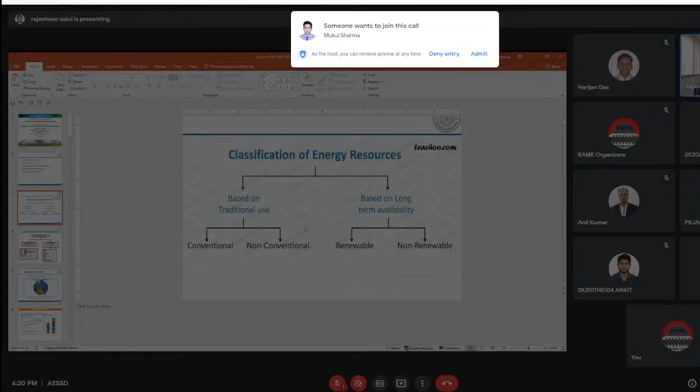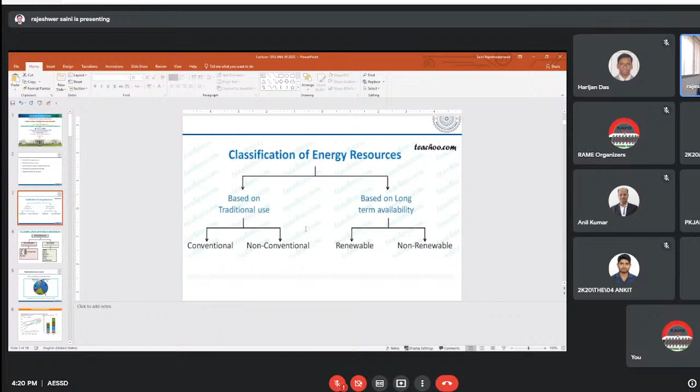I'll start with the basics. We all know energy resources can be classified - sometimes we use terms like conventional and non-conventional, sometimes renewable and non-renewable. Based on traditional use, what is conventionally being used is known as conventional source of energy, and non-conventional is what we've just started using. Based on long-term availability, this is renewable and non-renewable.

So how do we define renewable energy sources? We all know that non-renewable sources are not replenished after use - if you consume that source, it will not come back. But renewable energy sources are naturally replenished after use. That's the advantage and the beauty of this, because we don't have any problem with the quantum. We have substantial use of non-renewable energy, and we have fear that after long use, this will be vanished. But that is not the case with renewable energy.

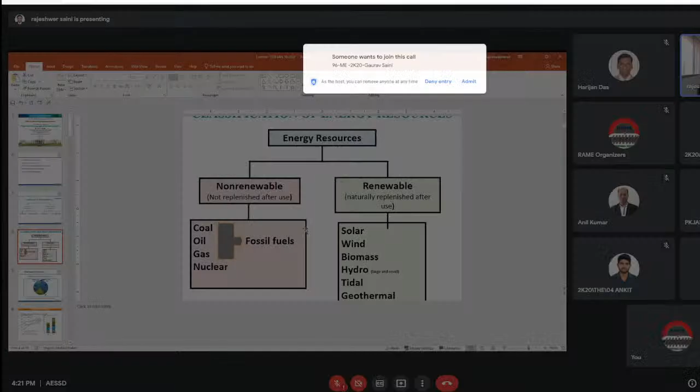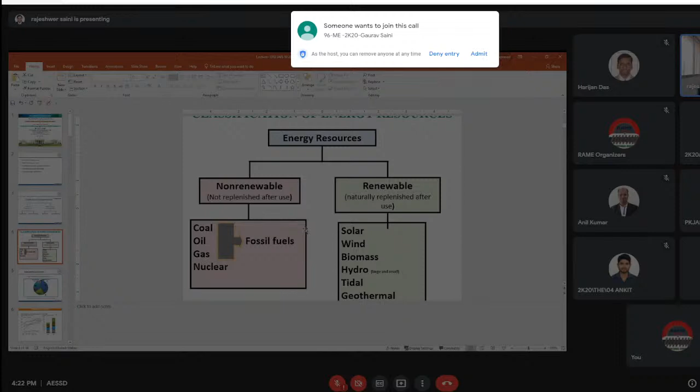In India, we are lucky to have a lot of renewable energy sources, especially solar energy, wind, biomass, and hydro. Among these, solar energy - we fall in a region of the world with maximum intensity of solar radiation intercepted over the Earth's surface. Wind we also have, but it's very site-specific. Biomass, of course, and we have a huge amount of hydro power.

I'll be talking about this because in 1.5 hours I cannot discuss how we estimate these resources and the basics behind the technology, but I'll talk about the potential and related technology. Finally, I'll discuss the integrated renewable energy system - what is the need for it, and how we can start working in this area, because we have a lot of scope there.

Especially I'm talking about the grid-connected system - there we can rely upon a single resource, but in remote areas where the grid is not available, there the role of the integrated renewable system comes in, and then we can achieve sustainable development through this integrated renewable energy system.

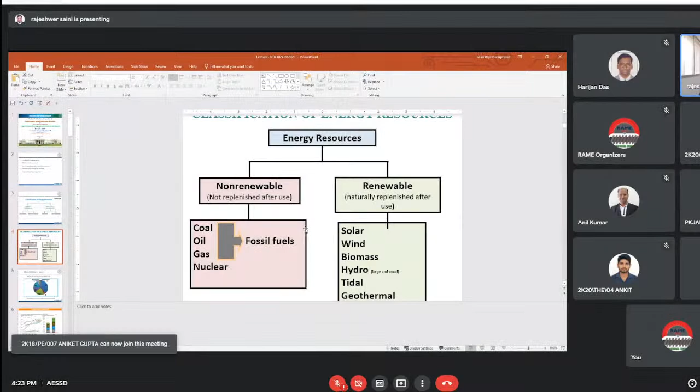This is an overview of the global electrical power scenario. We know that worldwide, about 64% or more than 60%, we still rely upon fossil fuels, and there are a lot of disadvantages. Apart from it being a fixed quantity, there are environmental issues - global warming and CO2 emission problems.

That's why the world has started thinking about renewable energy. In India, we worked in wind energy and hydro exclusively, but after 2010-2012, when the Jawaharlal Nehru mission came into existence, we started working in solar energy, because we have a lot of solar energy potential.

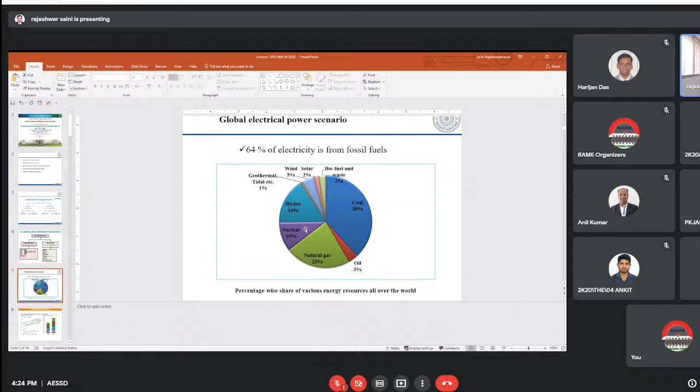I'm talking about a similar situation we have in India also.

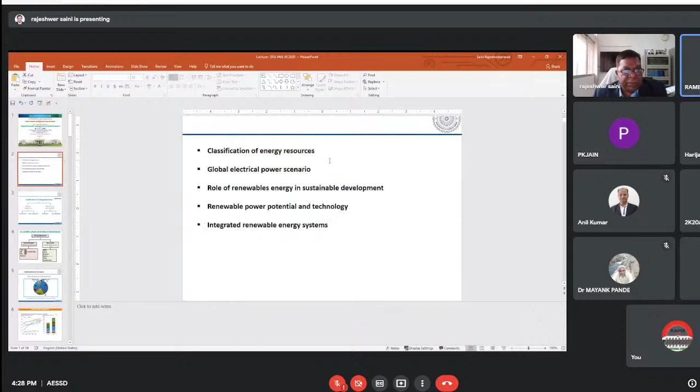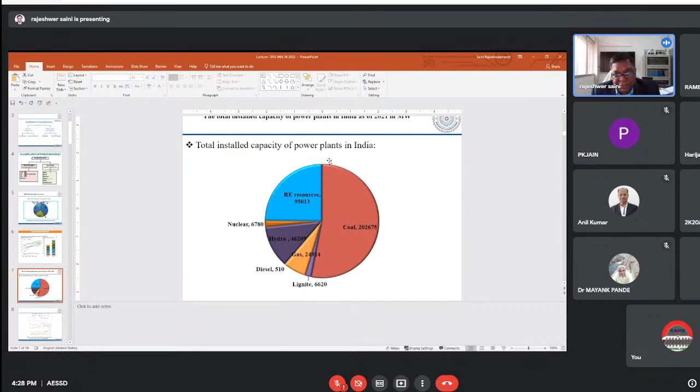I just discussed that still in India, we are relying upon fossil fuels, and about more than 64% we are still generating through fossil fuel. So we have to reduce this share with renewable energy sources.

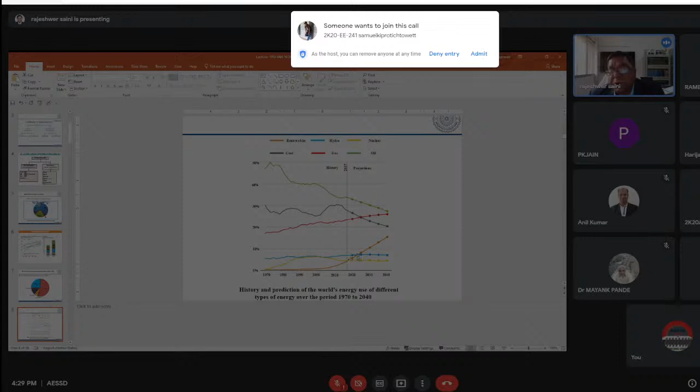Is it visible, I think? Hello, yes sir, okay yes sir. So as I told you, when we started developing the solar PV based plant, the share of renewable energy is going like this trend only. So that means we hope that up to 2040, we will be comfortable, meaning most of the share of renewable energy consumption or energy generation will be through renewable energy sources.

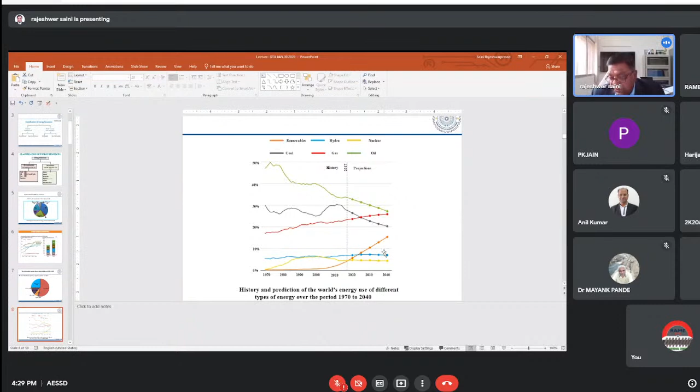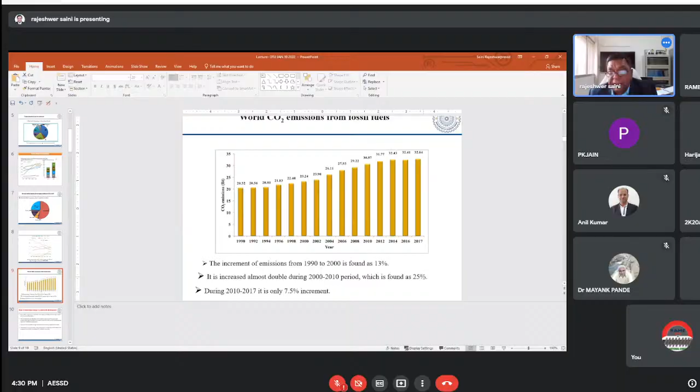The impact I'm giving you is that since 2000, after 2012 and 2014, CO2 emission increment from 1990 to 2000 is around 13%. I think we can see over here. And it was almost double during the 2000-2010 period, which is found as 25%. And now from 2010 to 2017, it is only 7% increment, because we have started developing solar photovoltaic plants. So that is the impact on CO2 emission we can have.

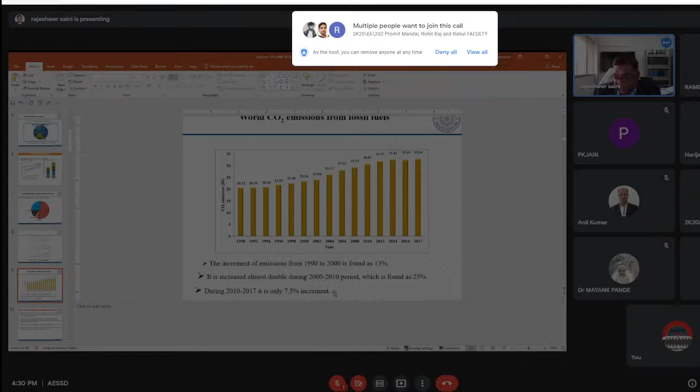So similarly, we have to increase the share of renewable energy sources in order to generate electricity or for energy consumption. So this role of renewable energy in sustainable development, I'll read these few points so we can understand the importance of integrated renewable energy. Renewable energy has an important role to play in meeting future energy needs in both rural and urban areas. When we talk about integrated renewable energy systems, the focus is on rural areas where we don't have the grid, or conventional source-based power generation. So there, integrated renewable energy applies in the rural area. But of course, renewable energy also has a role in urban areas.

The development and utilization of renewable energy should be given high priority, as we all know, especially in light of increased awareness of the adverse environmental impacts of fossil fuels. The need for sustainable energy development is increasing rapidly in this world, as we already discussed. Widespread use of renewable energy is important for achieving sustainability in the energy sector in both developing and developed regions. That means the role of renewable energy is something we have to consider.

In both ways, we have to develop some mechanisms to assess the potential. There's still a lot of work to do. We have some data on how much of particular renewable energy sources we have, but that data is not very reliable. So we have to work so that we can come to know the exact value, or near the right estimations. Why am I talking about this? Because based on the estimations, that will encourage us. If we know the potential estimation correctly, there's a chance we will have optimal design or development of the technology.

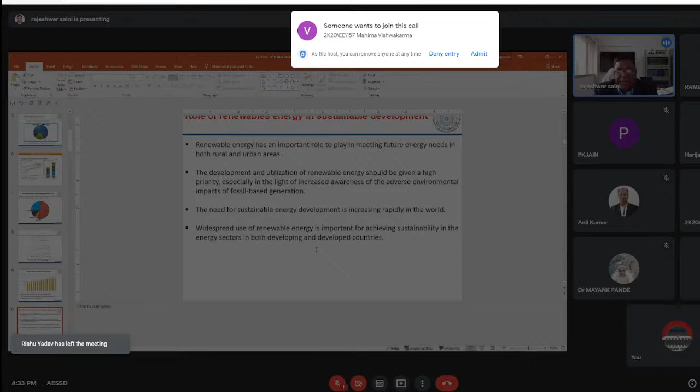That is very important, because the engineer's task in the area of renewable energy is to convert the basic form of energy into a useful form of energy. That conversion device we sometimes call the prime mover, and that can be optimized - it should be efficient, reliable, and cost effective simultaneously. That's possible only if you know the correct estimation of the available source of energy, that is, the available amount and potential of that particular source. So that is very important.

So here I'll give some points on where the scope is for doing research, from an academic or R&D point of view. A lot of scope exists to devise and develop models - even for wind energy, we rely on weather monitoring stations, but we still need to develop models, because we are estimating the potential based on various assumptions.

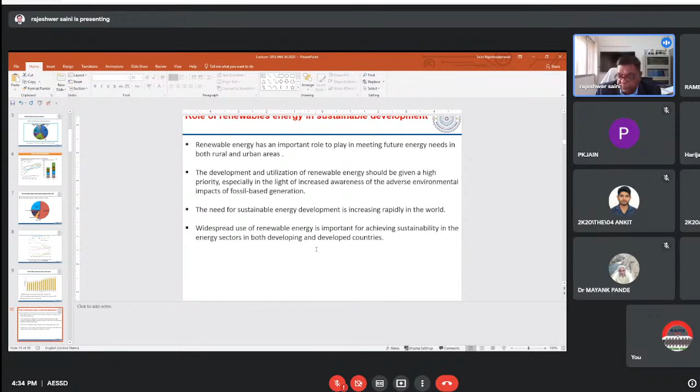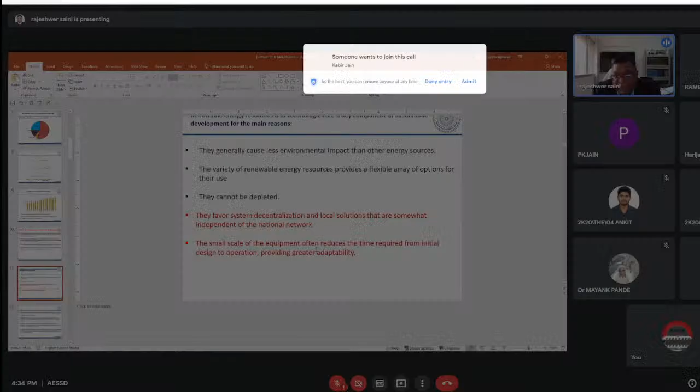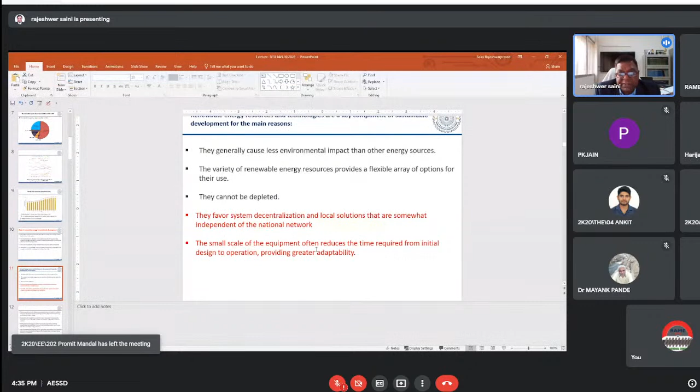Similarly, solar energy and biomass also show there is scope for this. In particular, I'm talking about integrated renewable energy systems. These last two points favor system decentralization and local solutions that are somewhat independent of the national network. Various industries are developing systems and technologies sized for large scale, which may not be useful or cost effective in rural areas where we have to integrate renewable energy sources. So we have to think about smaller sizes. Small scale equipment often reduces the time required from initial design to operation, providing greater adaptability. That is what we have to think about related to integrated renewable energy systems.

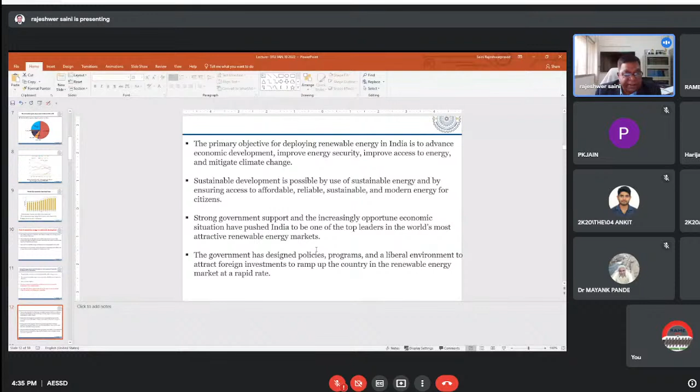These points show the importance of integrated renewable energy for sustainable development. Now, as I told you, I will give a brief about the sources, the potential, the related technology, and some issues related to technology which we should think about as researchers or academicians, which we can communicate to our students so they can start working in renewable energy, in particular integrated renewable energy systems. I think this picture will show that.

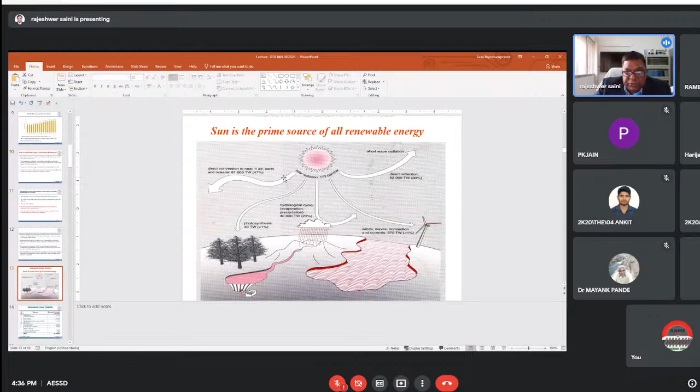We know that the sun is the prime source of all renewable energy sources. If we talk about solar energy, we are not interested in the indirect uses like growing trees, the hydro cycle for hydropower, or wind energy from uneven temperatures. As far as solar energy is concerned, only 47% of the total solar radiation emitted from the sun reaches Earth's surface, so our concern is to tap that. Only a small fraction of that can be tapped due to the atmospheric conditions around the Earth.

Just to give the idea, these figures are dynamic and we have some basis for them. For example, when we had the technology to install wind turbines up to a maximum 80 meter high tower, the potential was about 1 lakh megawatt. But now we have technology to install turbines over 100 meter high towers, so the potential increases because wind speed depends upon height.

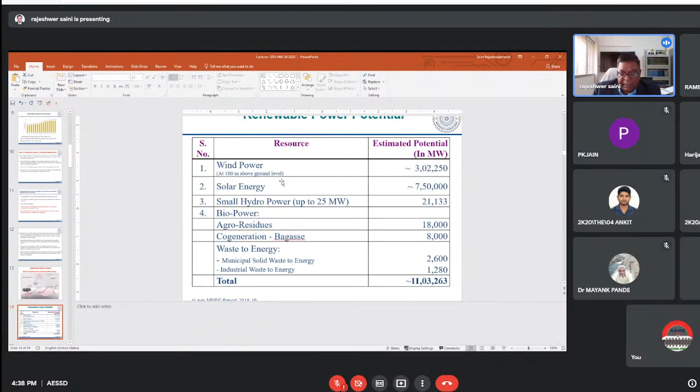Similarly, for solar energy we have estimated 7,50,000 megawatt potential, considering the available land, since it basically depends upon the Earth's surface area. Small hydropower up to 25 megawatt, as defined in India, is around 21,000 megawatt. Biopower includes bioenergy, agro-residues, cogeneration, bagasse, and waste to energy. This table shows that only a very small fraction has been tapped so far. If you look at power generation, a lot of potential has already been identified; we just have to tap it, and I'll discuss what the hindrance is to doing that.

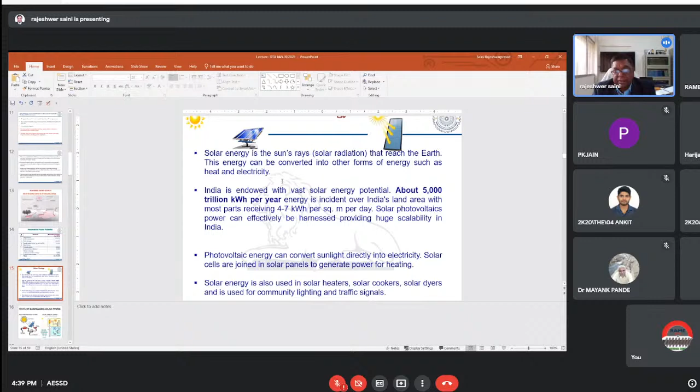Quickly, talking about solar energy, as I already told you, we are lucky to have about 4 to 7 kilowatt hour per square meter per day, averaged over 24 hours. That's good enough, in the maximum range of solar radiation, which is 4 to 7 kilowatt hour per square meter per day.

Let me talk a bit about the technology. Solar energy can be tapped by two different routes, and this is the beauty of solar energy: if you need thermal energy, it can be directly converted to heat energy, and it is the only source where we can generate electricity without a conventional generator. So these are two different routes we have to think about.

If we talk about integrated renewable energy systems, the sizing of a solar photovoltaic system is very important. If you are sizing the solar PV system for a grid connected setup, there's no problem, it just depends on how much money and land you have. But when you talk about an off-grid system, the sizing of the PV system is a big and extensive exercise needed in integrated renewable energy systems.

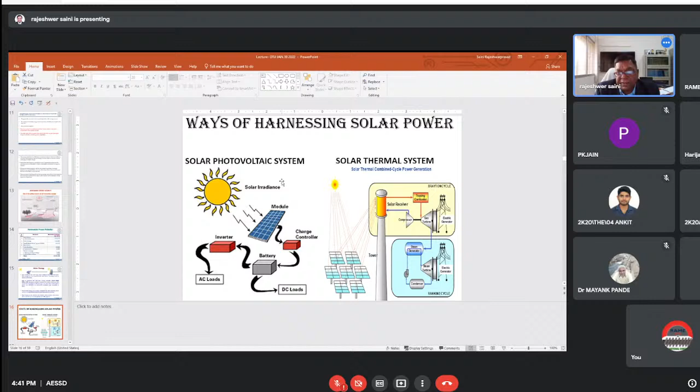We are still lagging in India because we don't have even a single large-size solar thermal plant. We should think about this, because in other countries like Spain and America, they have maintained a ratio between solar photovoltaic and solar thermal systems. Otherwise, that's the problem we are facing - we have started facing that storage problem. Whatever energy you generate through SPV, you have to put in the grid, and we don't have that reliability. But in case of solar thermal, that can be used for peak energy based plants. Storage is very economical in the solar thermal system, so we have to think about that.

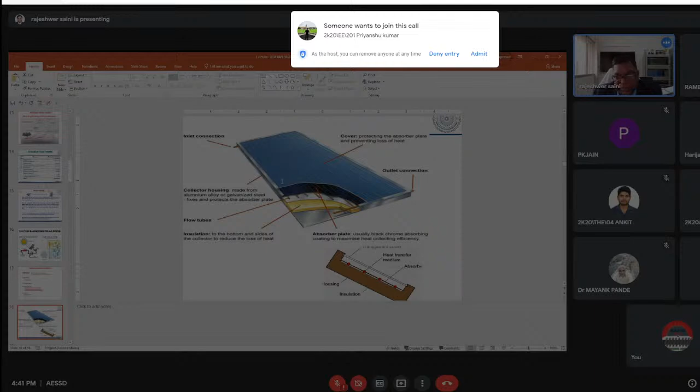So the solar thermal route is through solar collectors - basically flat plate collectors or focusing type solar collectors. In India we are tapping solar energy through this route mostly for heating purposes at low temperature, so hardly any plant exists. There's a lot of scope still there. We are not yet ready to generate electricity through this route, but we can develop the high temperature system. There's a lot of scope in that, and this route is basically for low temperature.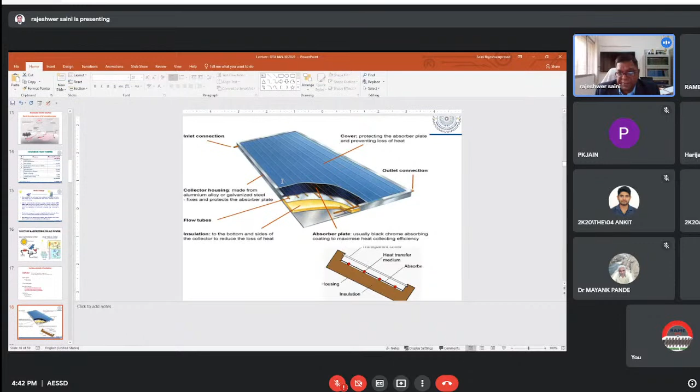This hot water system, mostly in India, we use for drying purpose or heating purpose, but mostly hot water systems. Still a lot of scope in this for high temperature. We have various types of focusing type solar systems, but still we have to do a lot in this area. We must do something - we must start developing this plant. Of course, nowadays we are very much concerned about how much gigawatt immediately, how many per year, and these real engineering plants are time consuming, so that means it is not coming up.

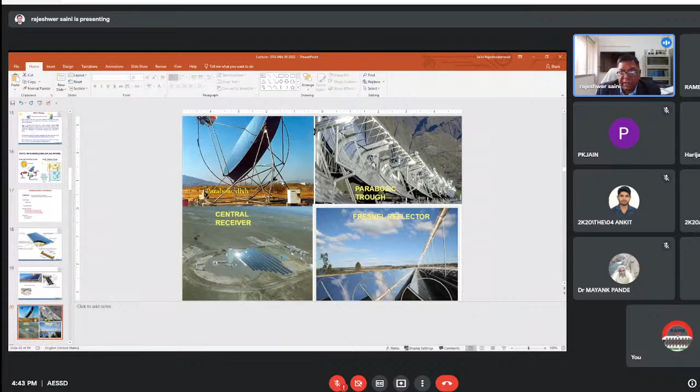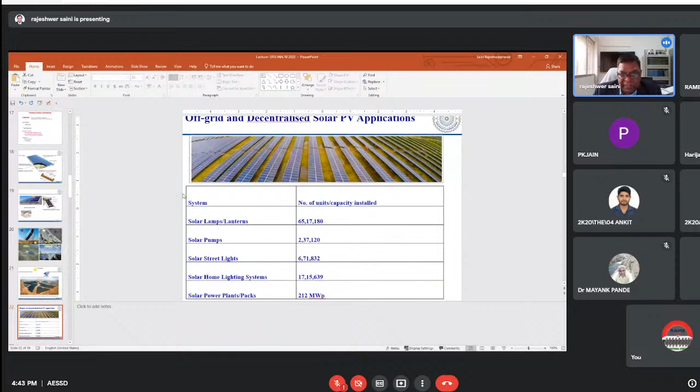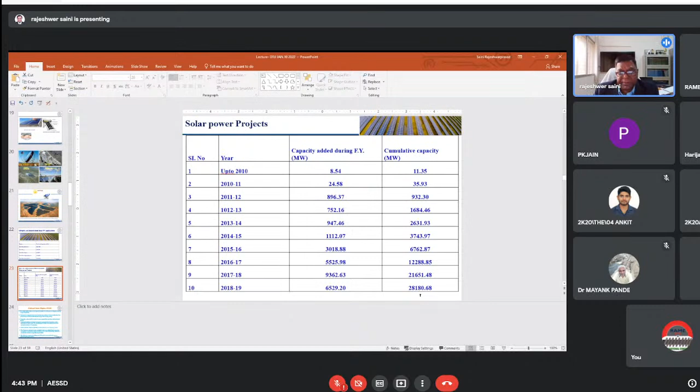Then we have some data on off-grid decentralized solar PV systems - these numbers are available on the MNRE site, so I have collected them from there. The solar power projects, year-wise, and the total cumulative capacity till 2018-19 - that data is available. As already told you, we have comfort - we are going with good pace at least in solar energy, and this is through the National Solar Mission we have been working on.

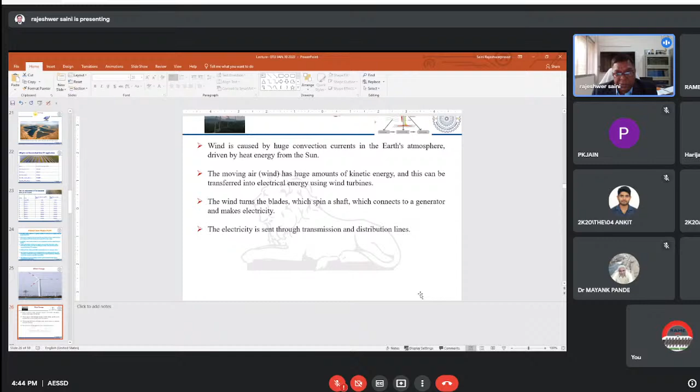Similarly, this wind energy - the site is specific, coastal areas like Tamil Nadu, Gujarat, we have good generation through wind energy. But there are some issues - there's a lot of scope to even estimate, or we have to develop models to estimate the wind potential in other areas too, because we don't have reliable data.

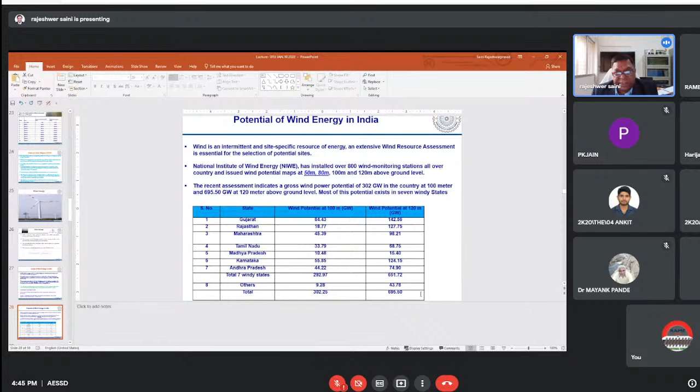If we have reliable data of the potential wind, accordingly we can size the system so it can be developed in a cost-effective manner. This is very much required in off-grid systems, because we don't need megawatt wind-based systems - we need aerogenerators of maybe 2 kilowatt, 5 kilowatt, 3 kilowatt. We still don't have such systems. If we develop the model to estimate potential in different remote areas - this data is taken from the MNRE site - we can confirm there's no problem as far as wind energy potential is concerned.

Quickly, about wind systems - for power generation we have propeller type turbines, and other types like cross flow, Darrieus, Savonius turbines. I'm trying to connect this technology - the similar turbine can be used to tap hydro potential available in flowing streams, so there's a scope of working there. This technology and systems have not come up to large size yet, but in remote areas for pico hydro - say 5 kilowatt, 10 kilowatt, 20 kilowatt or 100 kilowatt systems - can be developed by using this wind energy technology directly.

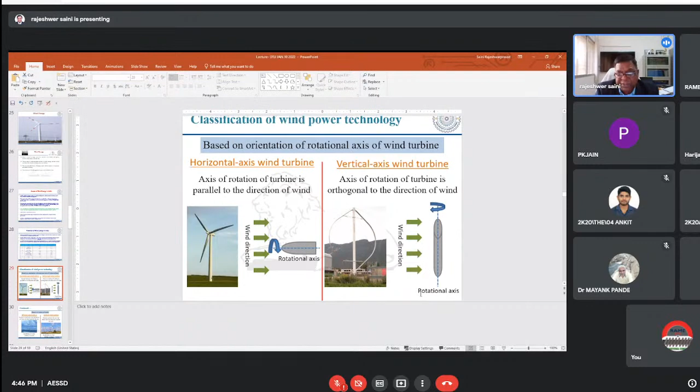It's a similar turbine, all kinds of turbines can be used for tapping the potential of hydro available in the flowing stream. So we have a lot of potential in our canals. That's the scope I'm giving here quickly. Otherwise, we have the propeller type system only.

Then hydropower, of course, conventionally the hydro potential which is available in the form of head, the pressure, has to be converted into mechanical energy through a turbine, and the turbine is connected to a generator. So it's a well proven, developed technology we have in India. And the turbine, if you are talking about it, is considered the heart of any hydropower plant, where mainly this energy conversion takes place.

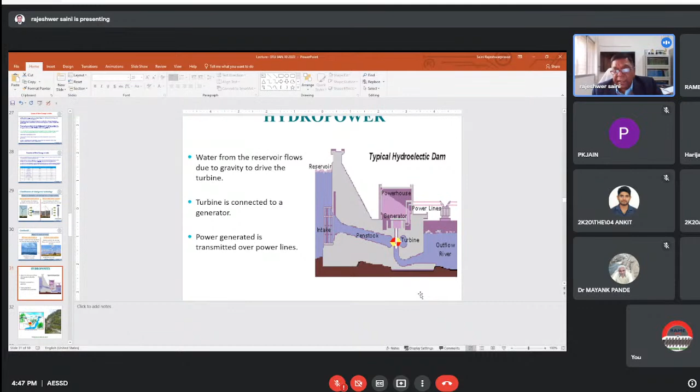So we have the technology to develop turbines, say up to 94%, 95% efficient turbines are available. That means as far as technology is concerned, this technology is matured in India. But again, I'm talking about large hydro. For large hydro, it is okay.

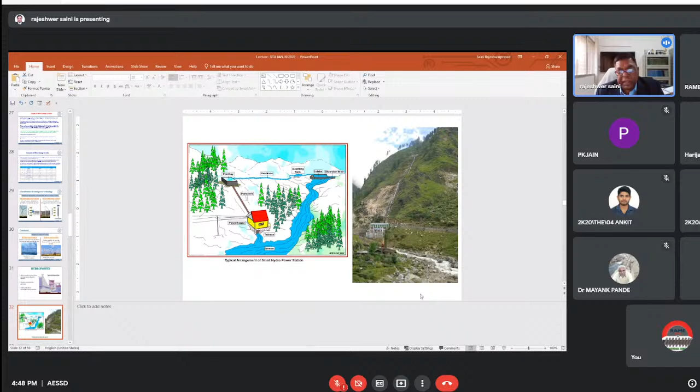We are comfortable with the technology, but when we are talking about integrated renewable energy for remote areas, pico hydro or small hydro—small hydro being 25 megawatts—I'm talking about micro hydro and pico hydro. There's still a scope to develop standard machines. We are lagging behind because manufacturers are not that interested to develop turbines of small size or pico size, because there's not much potential.

So we have to create this manpower, train the local people by using local technology, so that we can develop small size turbines and the related things.

There's still a lot of scope, and I tell you, if you just try to apply a scale-down technology to develop the machines, it cannot be accepted in engineering—technically it's not good. So again, we have to think, if we want to develop small size machines for integration of renewable energy sources in remote areas, we have to start from the basics, from the grassroots. Then only the technology can be cost effective.

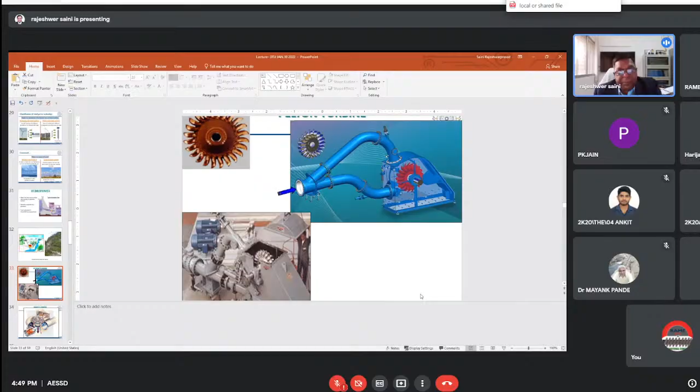That is the point—many people started working locally just with a scale-down approach, that cannot work, especially in hydropower. Solar energy, there's no problem, because the size is directly proportionate to the capacity. You just buy 2 panels, 3 panels based on the requirement. But for these hydro machines, that is not the case. You have to develop the things.

So I'm not going to discuss these various turbines here, but the potential of hydro depends upon the various types of sites, because it's a multiplication of head and discharge—that's the quantity of water and the head. If I have a site where there's very high head and less discharge, even then I can use it, but the machines will be different, the turbine will be different. If I have a huge quantity of water flowing, say in canals, and the head is very small, the same turbine cannot be used—we have to design a different type of turbine.

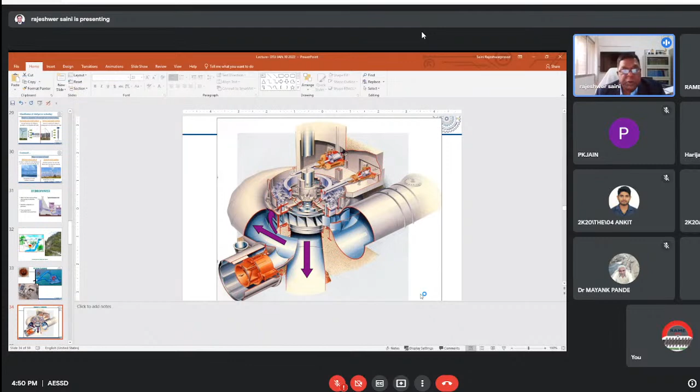Accordingly we have the Pelton, Francis and Kaplan turbines. As already discussed, in India, hydropower plants of up to 25 megawatts or below capacity are classified as small hydro, which have further been classified into micro, mini and small.

I'm talking about this for integrated renewable energy systems, because I'll discuss an exercise on how we can carry out the integration for remote areas, and we can discuss why it is important to work for smaller sizes.

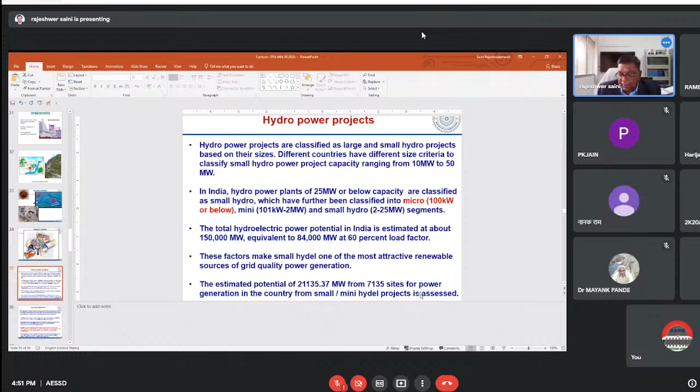I tell you that MNRE—nowadays hydropower is of low priority in MNRE. But still the government is very keen to develop pico hydro systems, that means off-grid systems in hydro. So there's a lot of scope.

There are incentives also—projects they are giving just in remote areas, so that you can tap the potential of hydro in the remote area and develop sites of say 10, 20, 15, 50 kilowatts, to power that remote area. So there's still a lot of scope in this micro hydro range.

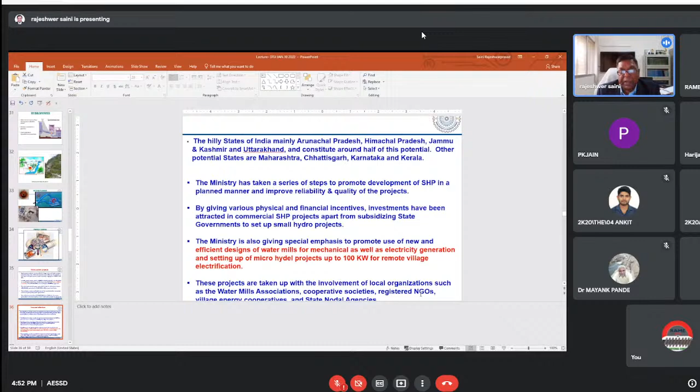Take the example of biogas in this biomass area. I think in 1980, the technology for generating power through biogas plants was well developed, and there was no flaw, and still the same technology can be used. But I don't think where it has gone. In our childhood, there were many plants - 10, 15 biogas plants in every village, and we saw those plants working very nicely. But now nobody is using them for fulfilling their cooking needs; everybody just uses LPG. I think these points we have to think about and motivate people on how we can reduce fossil fuels.

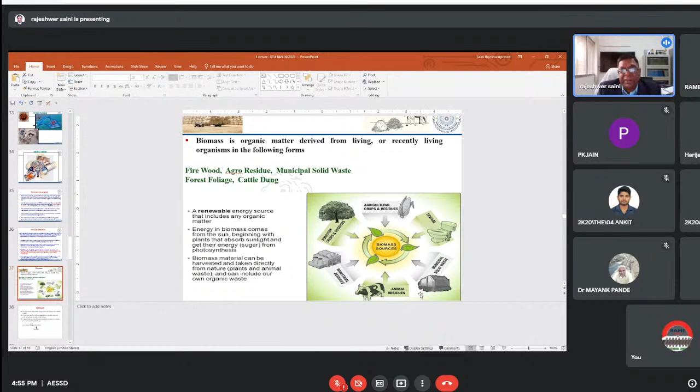But sometimes it happens that the government is also encouraging the use of LPG, and when LPG is easily available - I don't consider the cost - they reduce the use of renewable sources of energy. So sometimes we have to think about some policies and incentives from the government, which depends on that for sustainable development. I'm not going to discuss here the definition of sustainable development, but there are so many factors in this area we must think about and we can tackle them also. I'm not going to discuss all of this.

This potential data is available on the website. I think you can see this - I'm going to share this PPT with you, so you can see from there. There's nothing special to discuss in this.

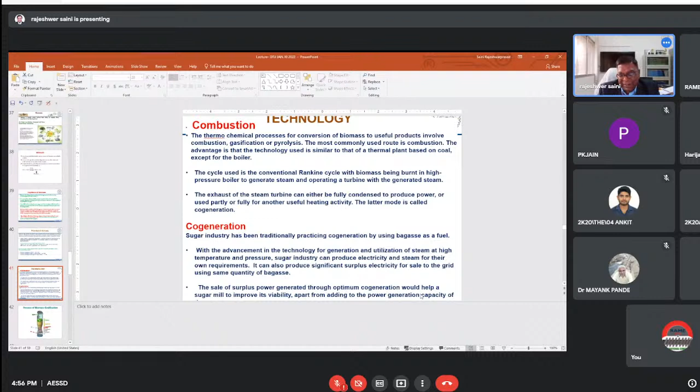As I told you, the technology related to biomass energy includes combustion and cogeneration. Cogeneration in India - our government has started working in this and we got some success. But for biofuel, you can see that farmers, in our region, like in Western UP, the price of sugarcane - farmers are crying over that. But what if we just produce biofuel from it? The government has to frame out some policies and guidelines so there's a lot of scope in that. Then we can say the farmer will become very rich if we start producing fuel from sugarcane. So this way we have to think about it.

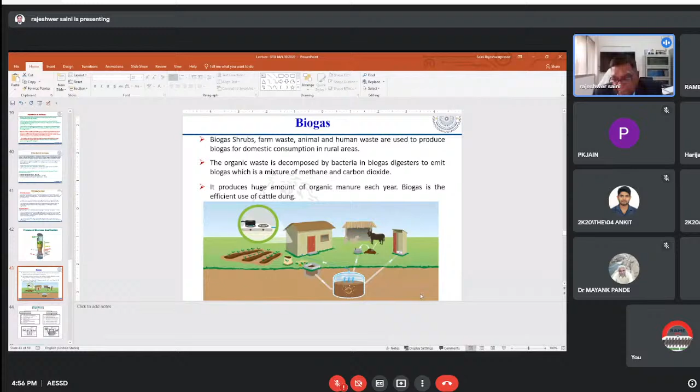Okay, this is the normal biogas and gasifier I'm talking about - this is biogas as I already mentioned. These are two systems. Long back, 40 years back, we had two designs of biogas - the KVIC and the Janta, and still there is no flaw in this technology. They are very efficient, but they totally stopped.

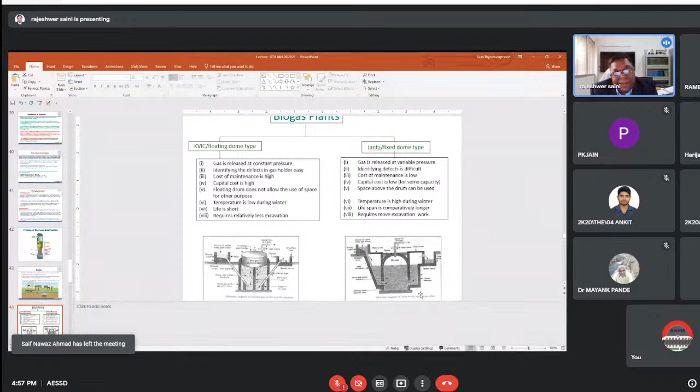Why? Because LPG is available to every household in the villages. I'll tell you, in my village, a biogas plant was installed in 1978, and it's still working. That was the Janta fixed dome type, and it's still working. So these are the points we have to consider - if some technology may play a role in sustainable development, then why have we stopped using it? These points we have to think about.

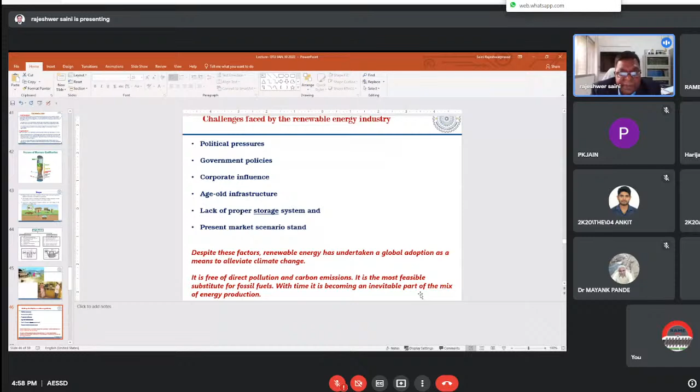Anyway, the challenges faced by the renewable energy industry are political pressure, government policies, corporate influences, age-old infrastructure, lack of proper storage systems, and present market scenarios. Despite these factors, renewable energy has undertaken global adoption as a means to alleviate climate change. Of course, we are repeating this many times - it is free of direct pollution. These are the points we have to think about - it's self-explanatory what the political pressure, government policies, and corporate influences are.